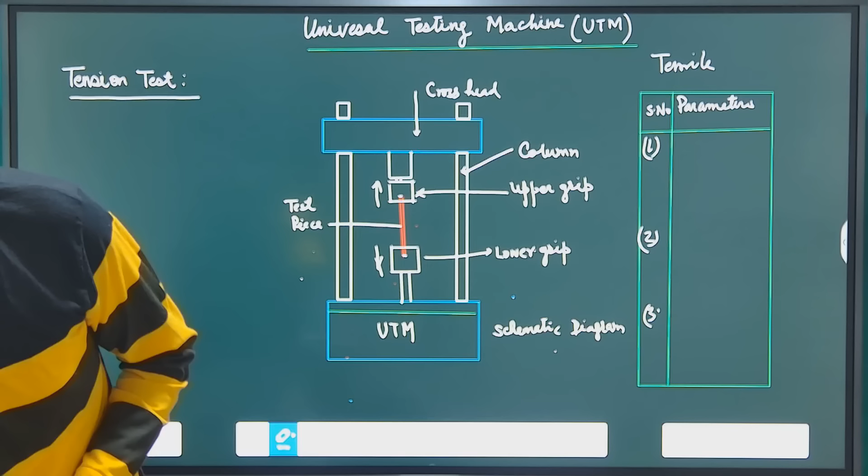हम लोग इस वीडियो के माध्यम से मैकेनिकल प्रॉपर्टीज ऑफ रिइंफोर्समेंट स्टील की स्टडी करेंगे। इसकी स्पेसिफिकेशंस IS 1786 में दिए गए हैं, जबकि मटेरियल पे टेस्ट कैसे किया जाएगा, इसका प्रोसीजर IS 1608 में दिया गया है। टेंसाइल टेस्ट के माध्यम से हम रिइंफोर्समेंट स्टील के यील्ड स्ट्रेस, अल्टीमेट टेंसाइल स्ट्रेस, इलॉन्गेशन, परसेंटेज रिडक्शन इन एरिया, यंग मॉडुलस इत्यादि को फाइंड आउट करते हैं। ये बहुत इंपॉर्टेंट प्रॉपर्टी होती है टू इवेलुएट द प्रॉपर्टी ऑफ मटेरियल। अगर कोई नया मटेरियल डेवलप करना है तो भी टेंसाइल टेस्ट की जरूरत पड़ती है। और क्वालिटी कंट्रोल में, द मटेरियल विच वी आर रिसीविंग, वो कितना स्पेसिफिकेशंस को मीट कर रहा है, उसके बारे में जानकारी हासिल होती है। So let us start the tensile test of the reinforcement steel.

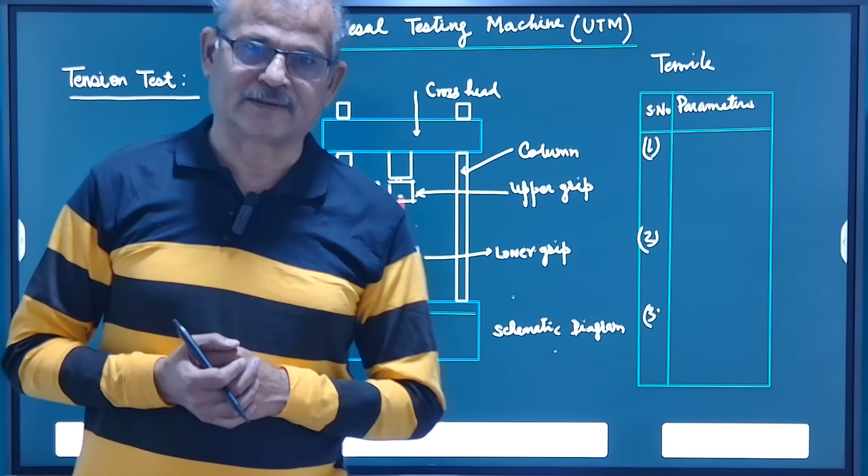To evaluate the tensile test of reinforcement steel, we use the UTM of different capacity, universal testing machine, right from 5 ton, 20 ton, 40 ton, 100 ton. These are all available depending upon the requirement, and used for determination of tensile properties of the material. In UTM there are generally three parts: upper cross head, lower cross head, and middle movable cross head. The specimen for the tensile test is placed between the middle and upper cross head in the grips, and there will be a control panel, and for recording the measurement nowadays computers are being used.

Otherwise there will be some enlarged display unit, from where we get the strength parameters, elongation parameter, etc. So the test piece is placed in the upper cross head grip and lower grip, and then tensile force is applied till it fractures. So the tensile test is carried out.

Tensile test on rebar is done to find out various mechanical properties. It is carried out for evaluating the properties of material. Second, development of new material. And most important is quality control.

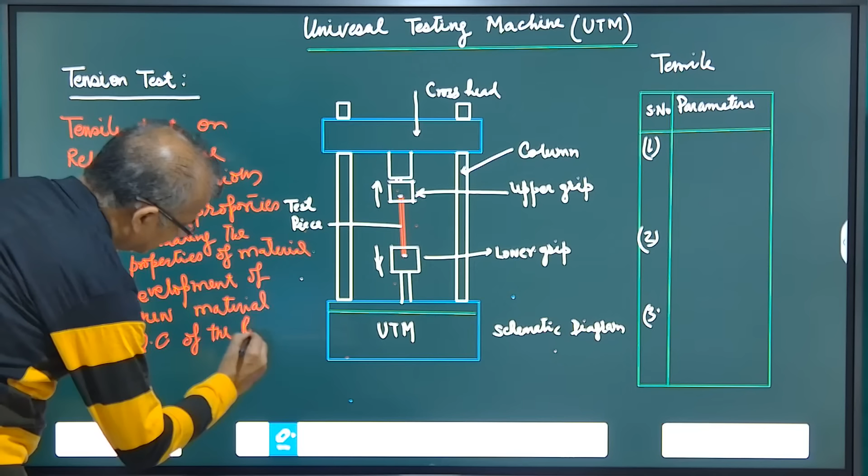Quality control of the reinforcement received at site. How much weight per meter? What is yield stress? What is ultimate stress? All this is found out from the universal testing machine by doing the tensile test.

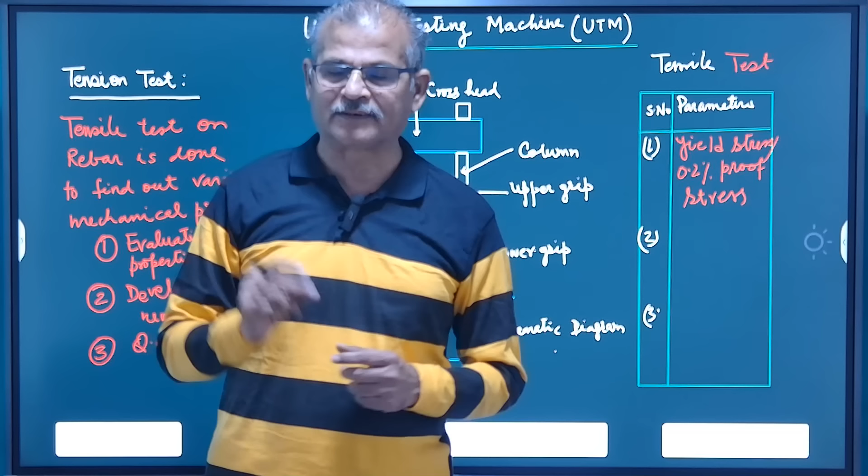So the parameters which we determine from the tensile test are yield stress, or 0.2% proof stress. In case of high carbon steel, we find out 0.2% proof stress because the yield point will not be defined. We will not get on the stress strain curve a definite yield point, so we go with the 0.2% proof stress. Then ultimate tensile stress.

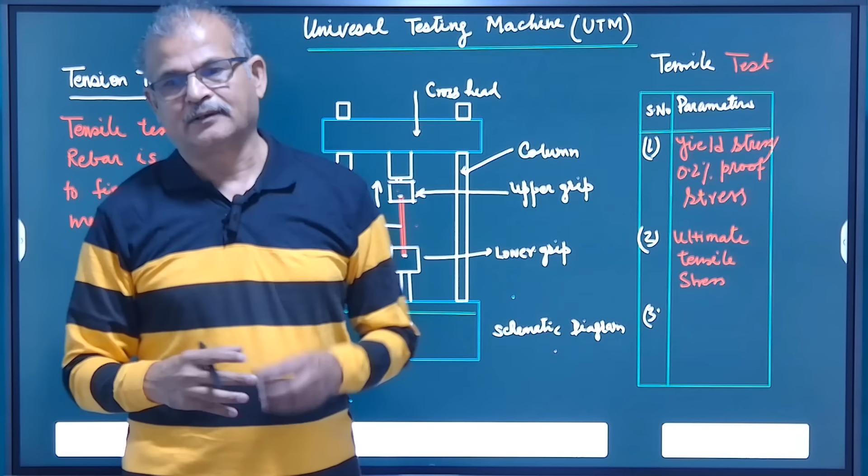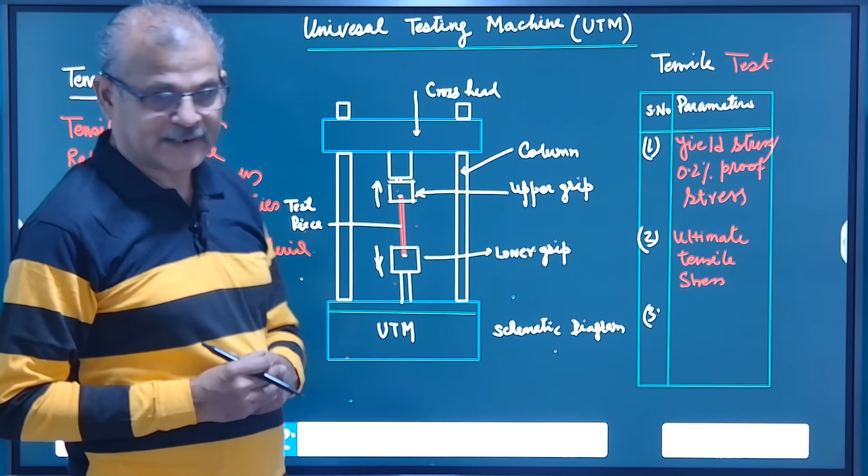Then maximum force - we find how much maximum force the material took before it fractured. So that gives us the ultimate tensile stress. Then percentage elongation - all this we find out with the help of the tensile test.

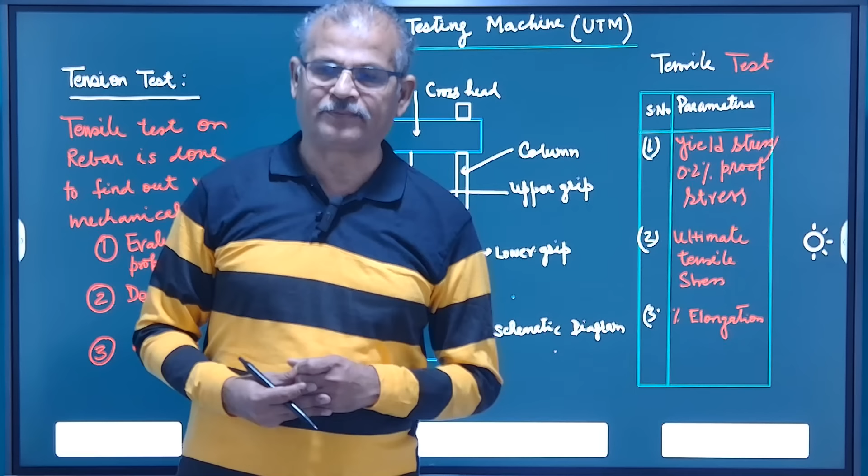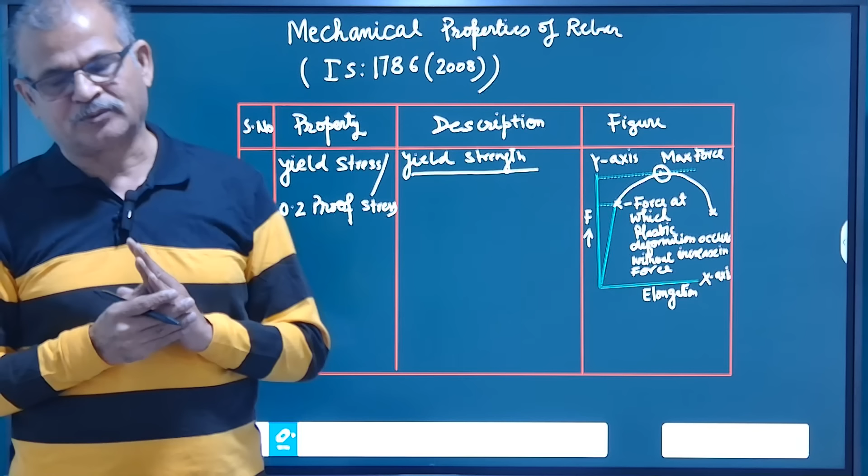So important parameters are yield stress, ultimate tensile stress, and elongation. Yield stress is a point corresponding on the stress strain curve where there is an increase in strain, increase in length, without increase in the force. So the point reached during the test, the maximum point, after which the material will not regain its shape and size, it will go for permanent deformation in the plastic region.

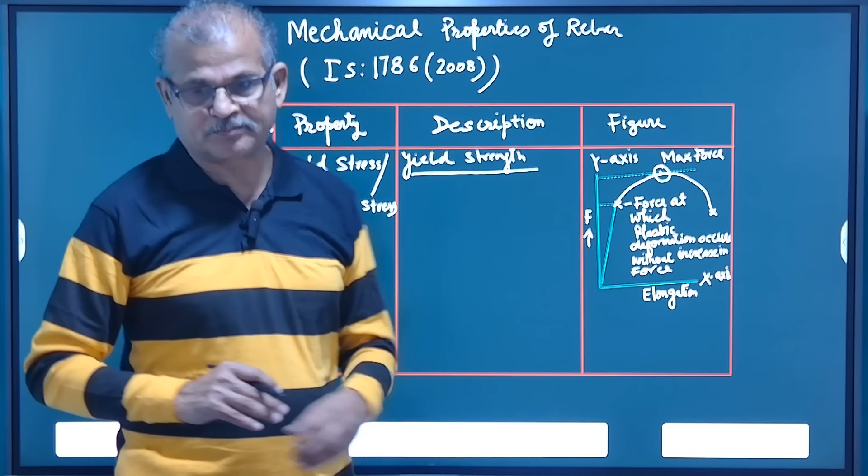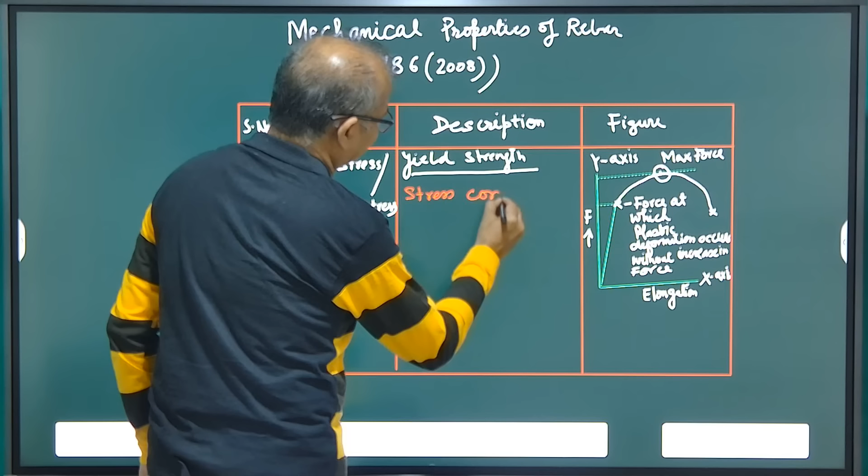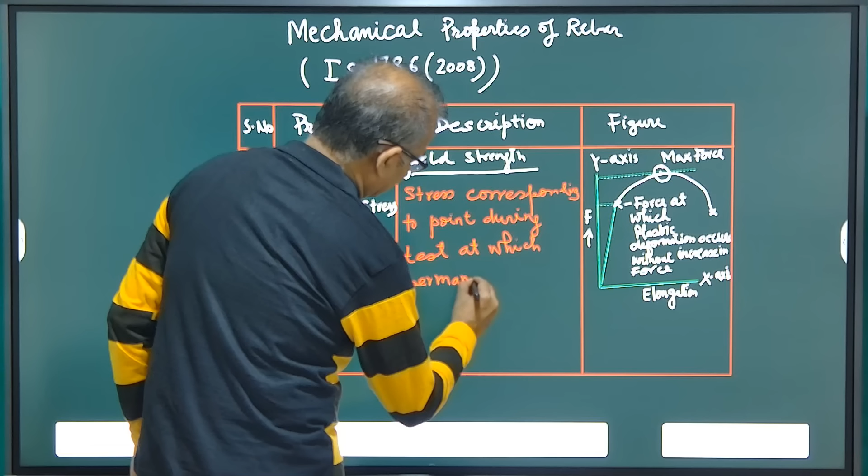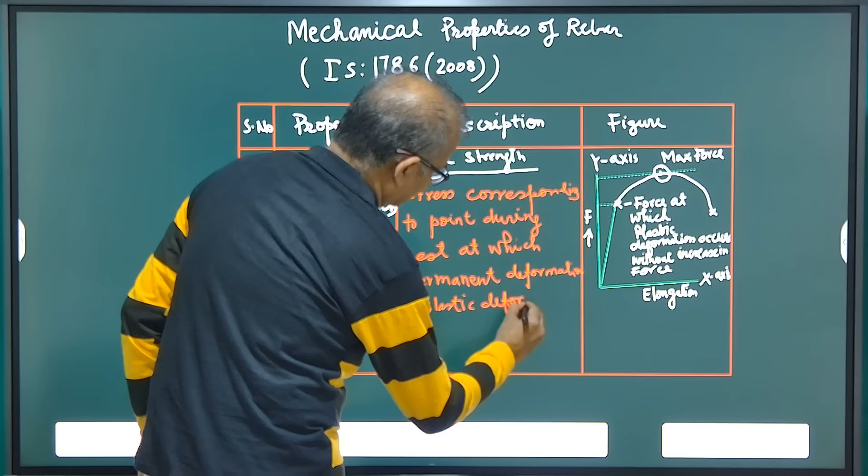That is the point, that is the force taken for the calculation of yield stress - the force at which plastic deformation occurs without increase in force. So we can define it as the stress corresponding to the point during the test at which permanent deformation, or plastic deformation, occurs without increase in force.

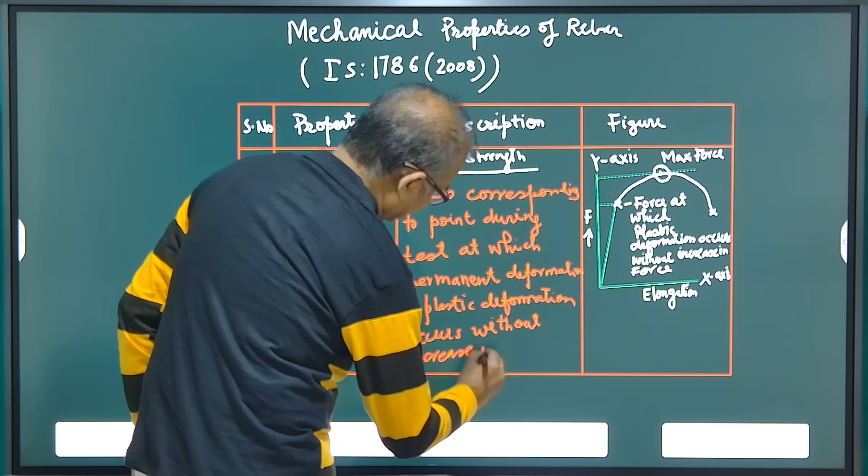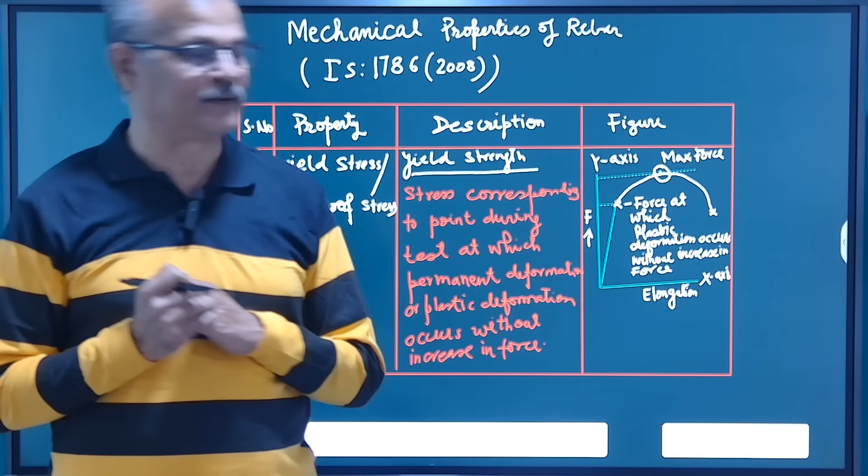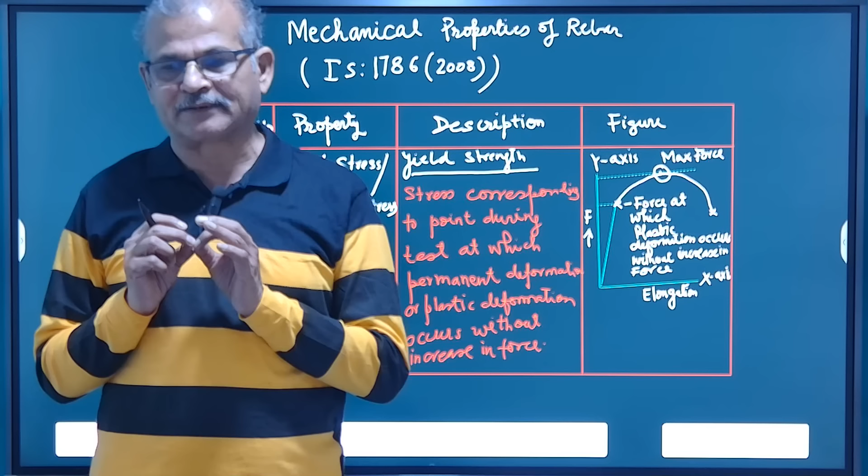During the test, जहाँ पर वह लोकेशन या वह फोर्स जिसपे परमानेंट डिफॉर्मेशन, प्लास्टिक डिफॉर्मेशन occurs in the test piece, that is known as the yield point, and the corresponding force is taken for the calculation of yield stress. So in the force versus elongation curve, there will be a point at which there will not be increase in the force, but there will be increase in strain, and that is the point where the permanent deformation first takes place, and that point is taken for the calculation of yield stress.

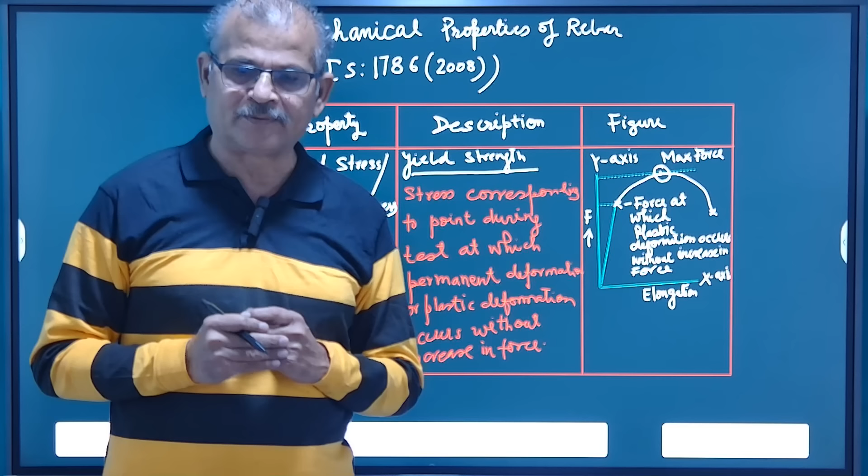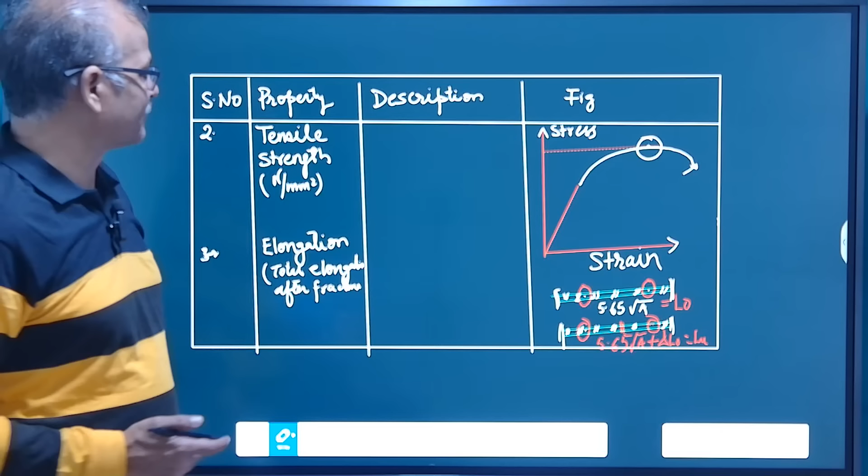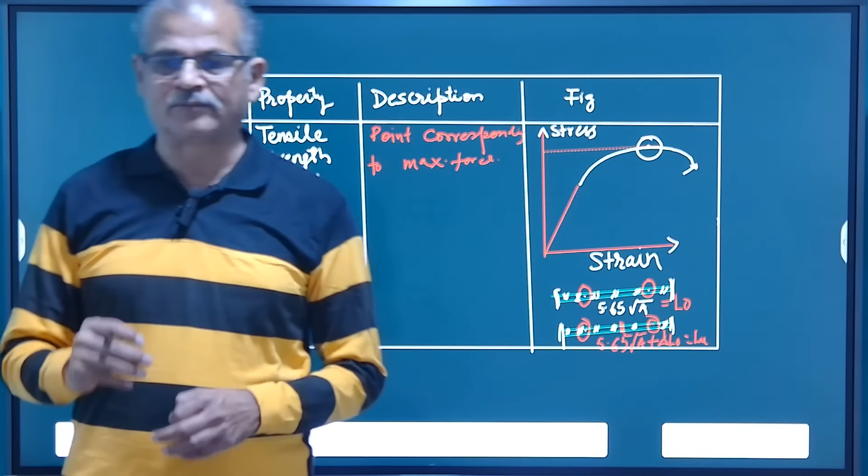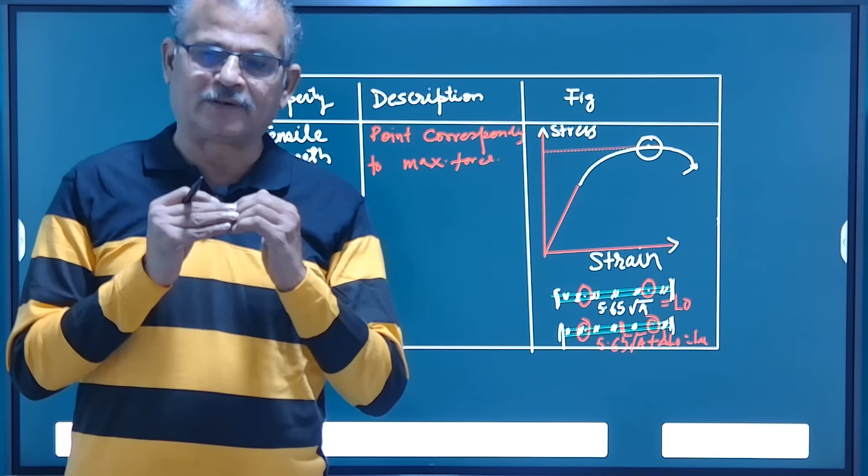The test specimen reaches maximum force, after which necking occurs and the force goes on reducing till fracture. So the upper point is taken as the ultimate stress point, and the corresponding load divided by area is the ultimate tensile strength. After that, necking occurs and the test piece is not in a position to take more load, so it declines and goes to fracture.

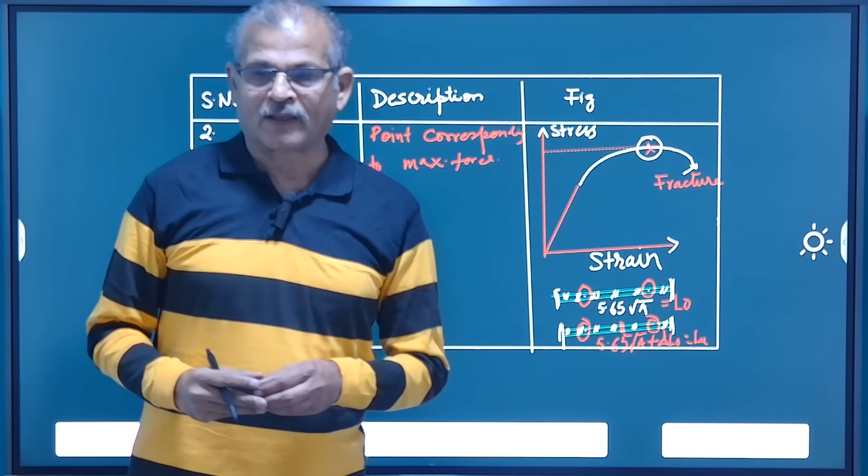So the load corresponding to the maximum point is the ultimate tensile strength, UTS. A point corresponding on the stress-strain curve to the maximum force is the ultimate tensile strength.

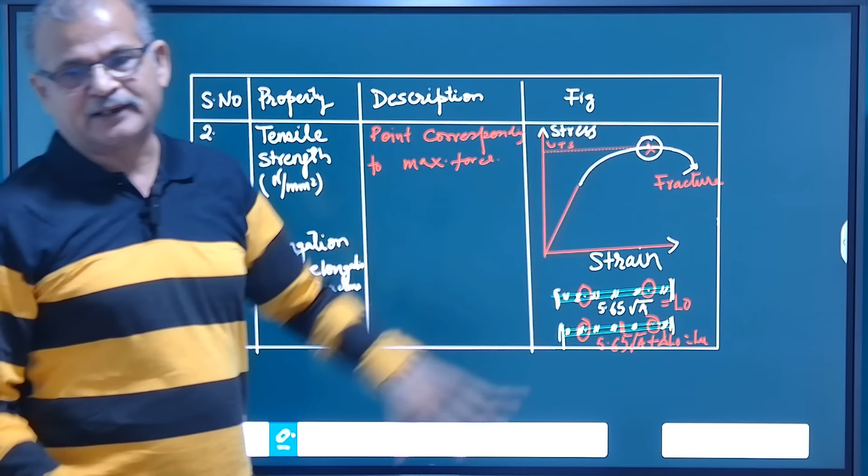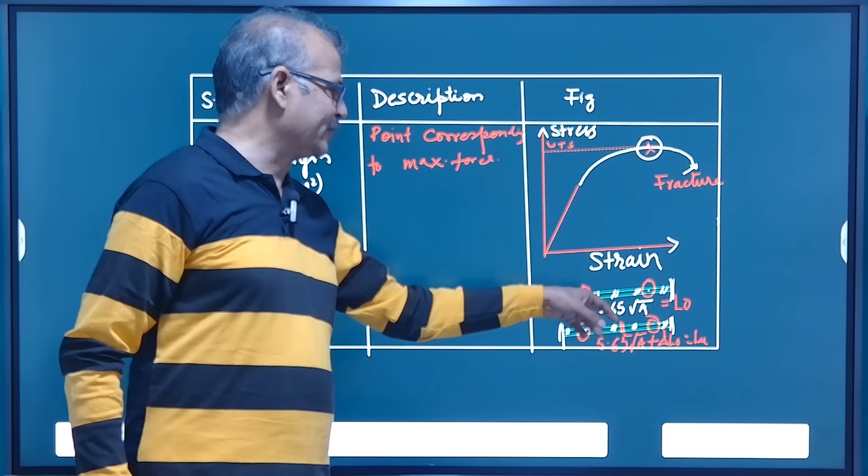Elongation is the change in length to the original length. If we have taken a gauge length of a specimen, say 5.65 root A is the gauge length, like for 20 mm it is about 100 mm gauge length.

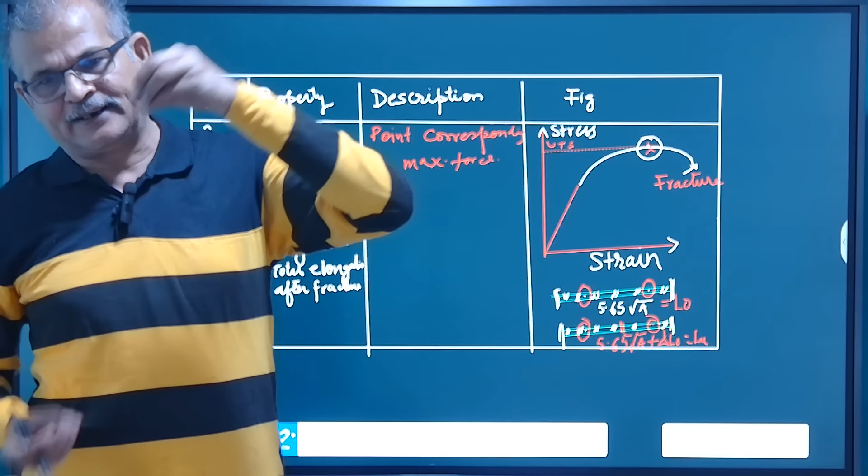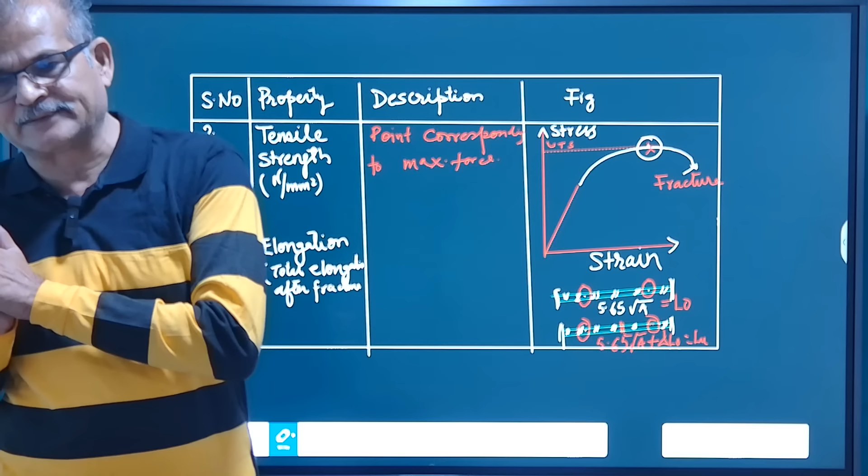If we press it into the tensile testing machine, it elongates. When we apply the tensile force, it elongates till fracture. So there will be an increase in length, that is delta L, meaning how much it has increased from the original length.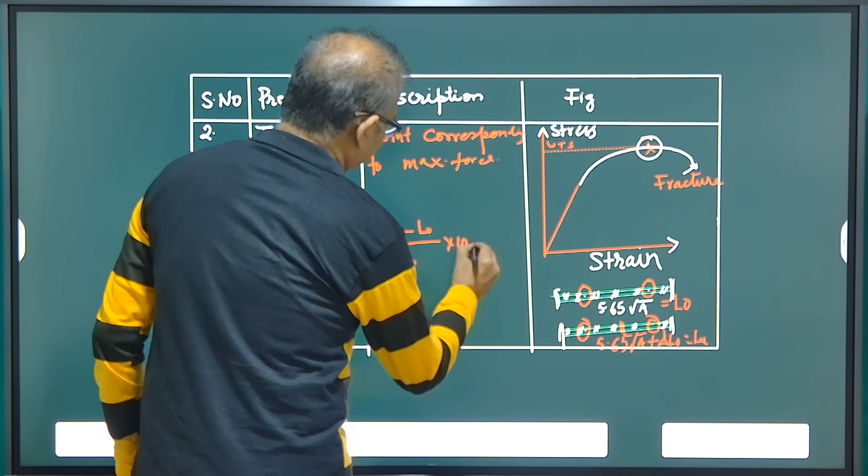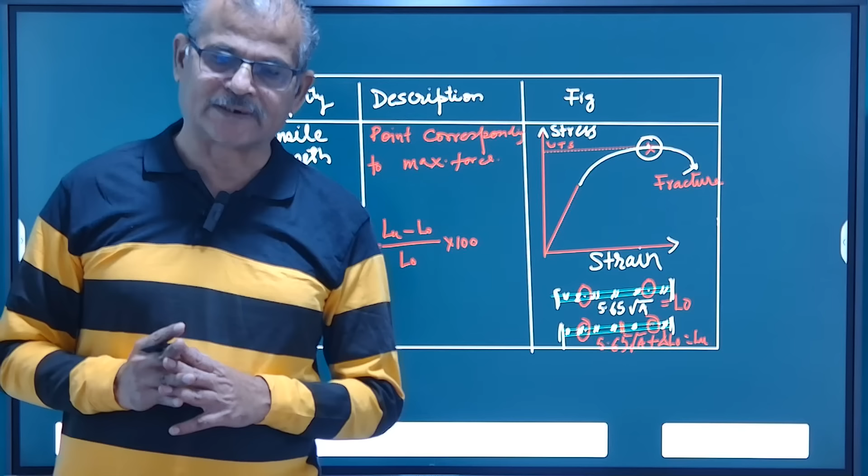So increase in length represented by Lu minus original length, divided by original length, expressed as a percentage. So elongation is nothing but the difference between the elongated length and the original length, divided by the original length. We find out the elongation, how much the material has elongated before fracture.

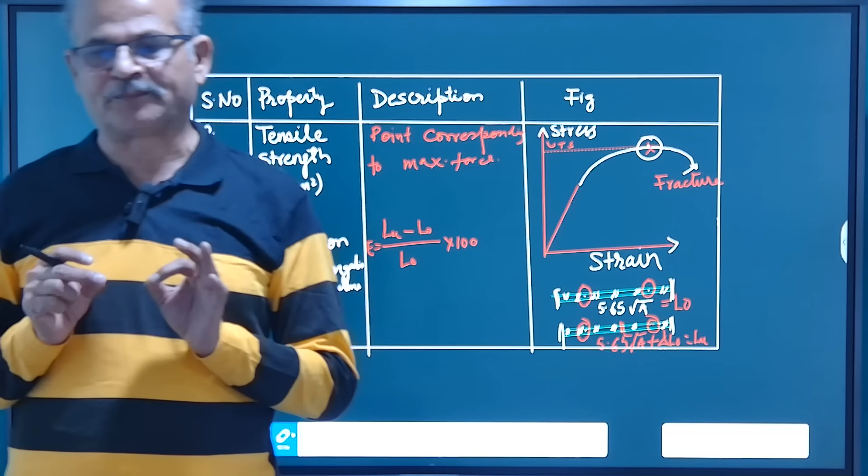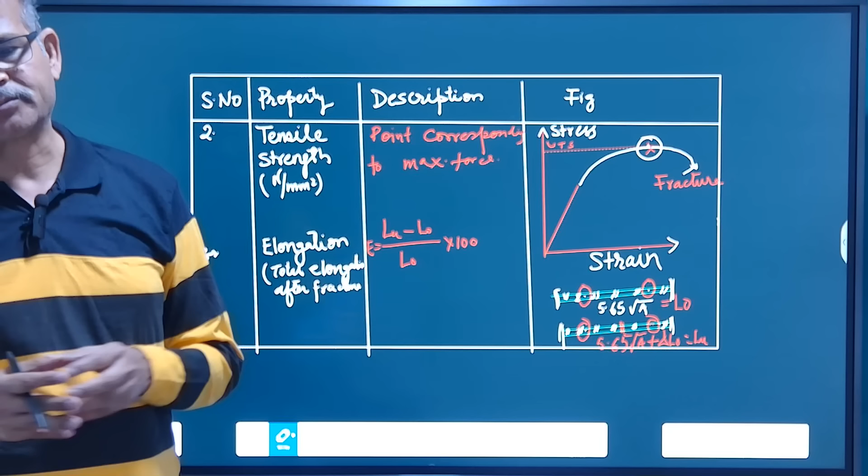So we take the test piece and find out the gauge length. Say earlier it was 100 mm and now it is 114.5 mm. So the elongation in the material is 14.5 divided by 100, giving about 14 to 14.5% elongation for that test piece, or that diameter of reinforcement bar.

So IS 1786 has given how much test selection should be carried out per heat. Serial number 1, sizes of rebar, all sizes.

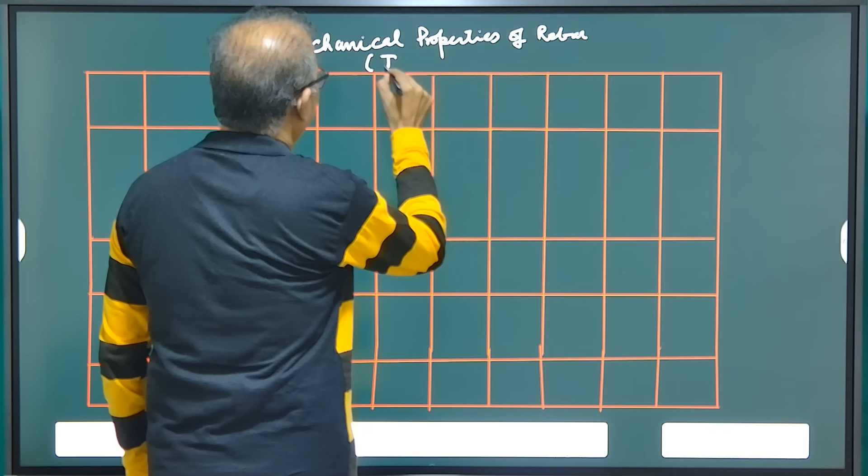So the mechanical properties of reinforcement steel given in IS 1786 are in Table 3.

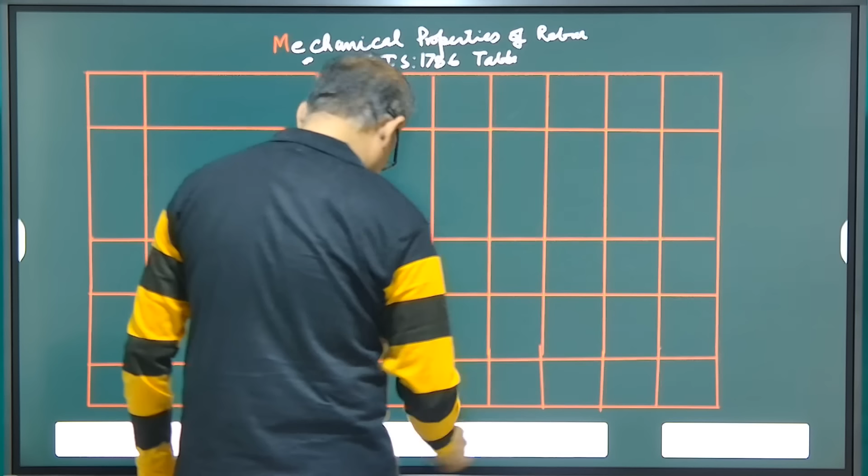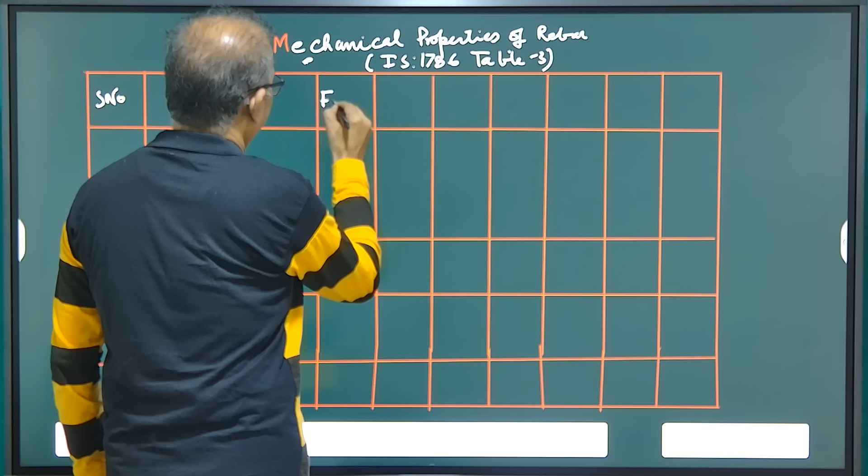Table 3 gives serial number, properties, and grade: Fe415, Fe415D, Fe500, Fe500D, Fe550, Fe550D. The first property is yield stress, or 0.2% proof stress.

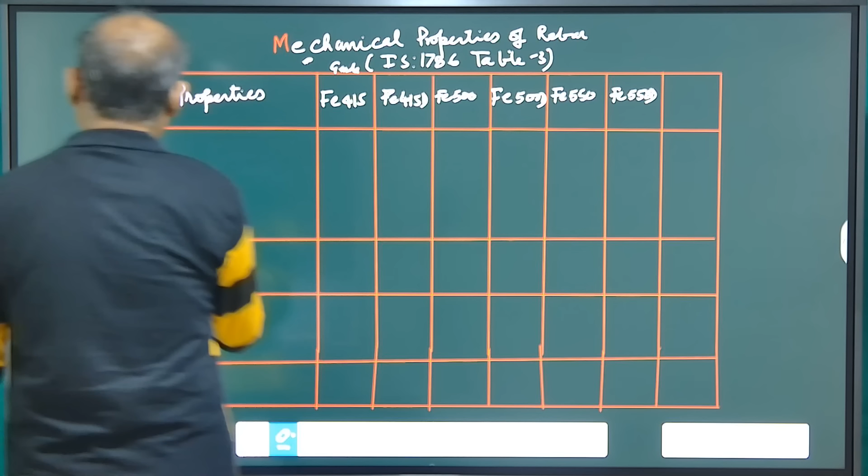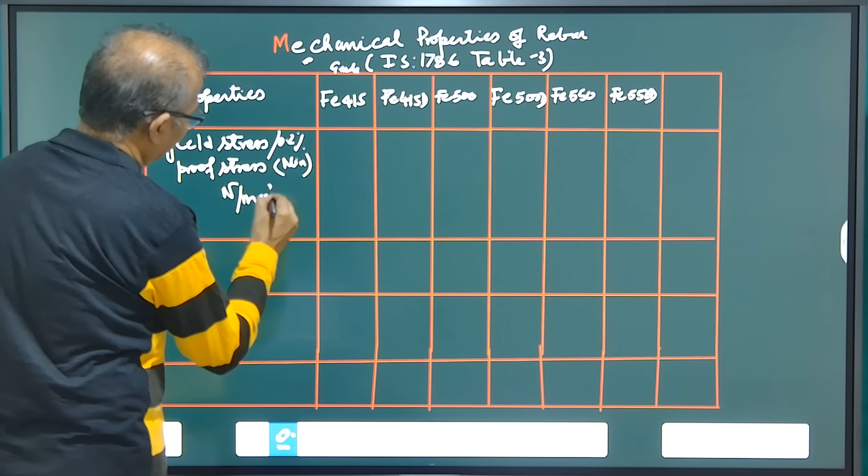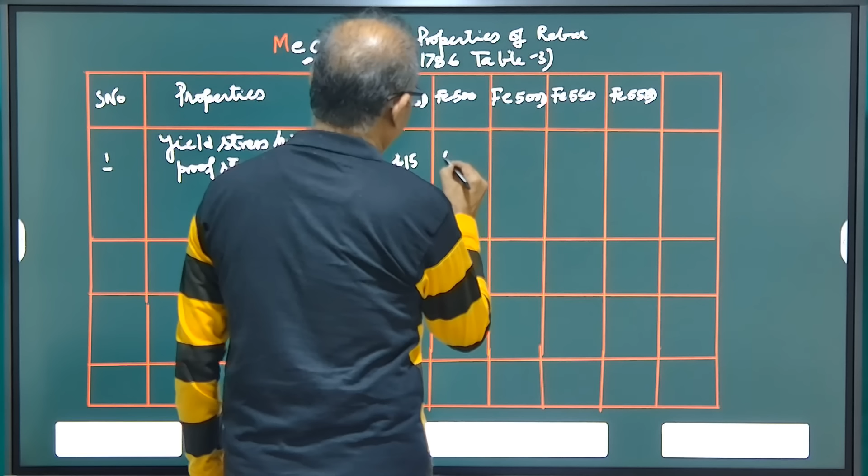The minimum yield stress, or 0.2% proof stress, is expressed in Newton per mm square. For Fe415 it should be 415 N/mm2, for Fe415D also 415. For Fe500 it is 500, and for Fe500D also 500 N/mm2. For Fe550 it is 550 N/mm2, and for Fe550D also 550 N/mm2.

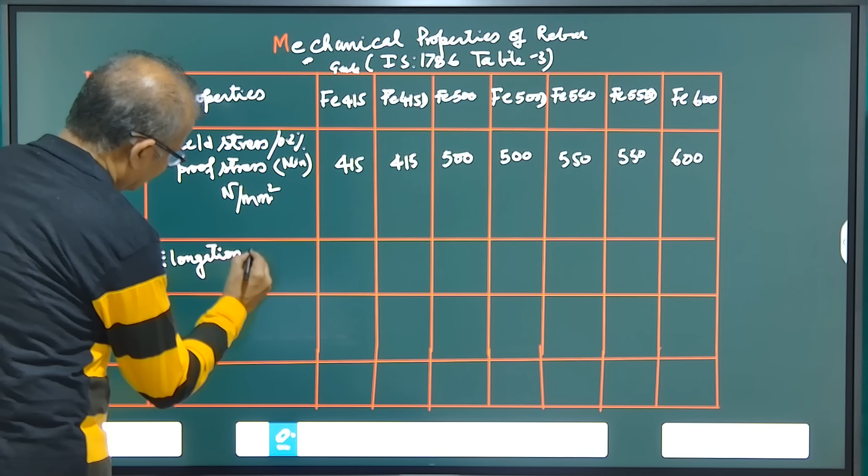For Fe600, the value is 600 Newton per mm square. And then the elongations, percentage elongation, for example percentage elongation for Fe415.